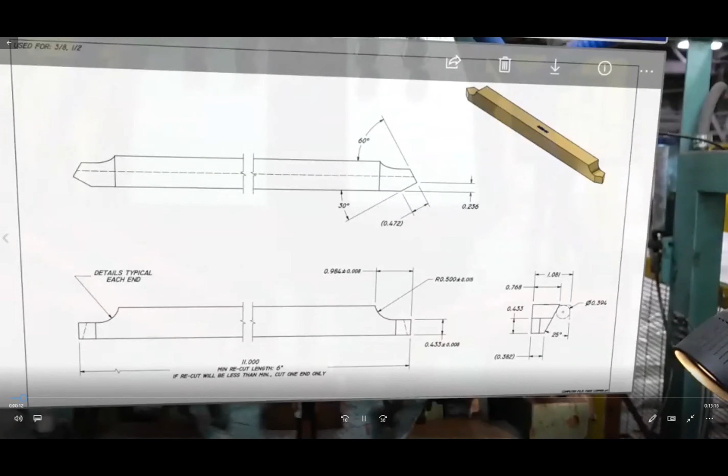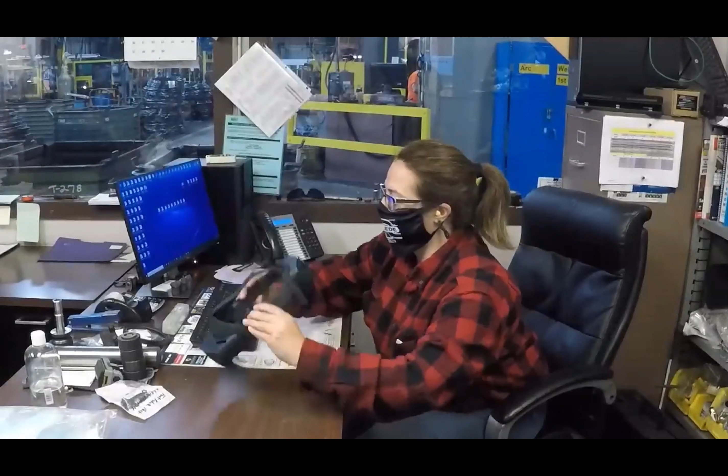So what is the HoloLens? The HoloLens is one way we're working smarter these days at Laclede Chain Manufacturing. This ultimate mixed reality device helps our maintenance department and gives our customers real-time visibility into their quality control process. Today, you'll be experiencing this technology firsthand. We'll be showing you two areas of our quality department: proof testing and pull testing to destruction. The HoloLens is certified protective eyewear made to withstand industrial environments. This augmented reality offers immersive interaction with remote support. Our quality control technician, Jesse, or any Laclede team member using this device, can view documents, prints, and 3D CAD models in real time. Now let's go experience traceability firsthand with our HoloLens.

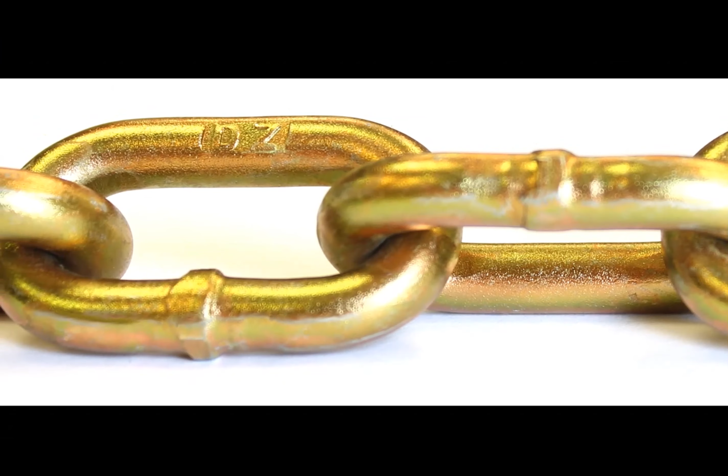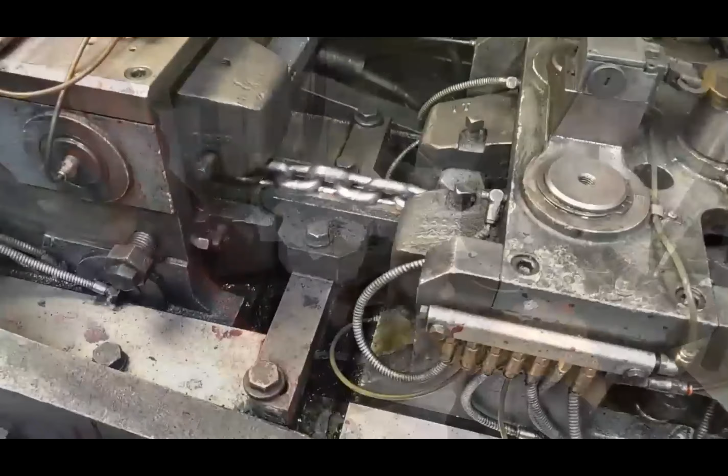At Laclede, every 6th link of chain is stamped with a unique trace code. If you were to have an issue with your chain, the trace code is what you would reference. All of our testing data is tied to that code. We test every link of chain twice, once after welding, then again during proof testing. We store all the critical weld data for each link, as well as the force at the proof tester for every pull of 2 times working load limit. All of this data is saved and archived and can be easily referenced if a customer has an inquiry.

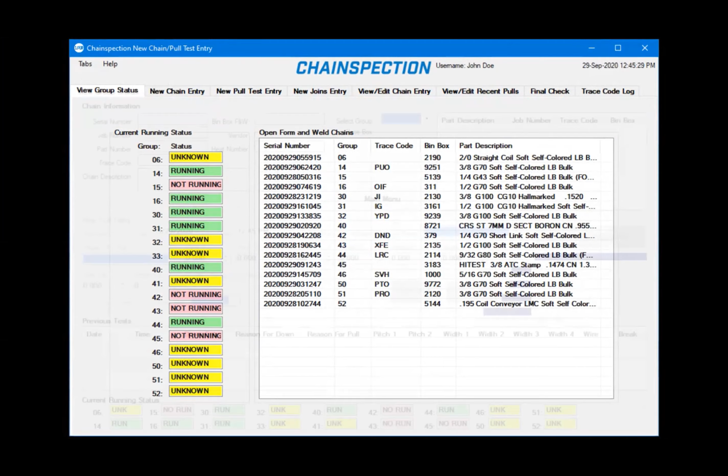Bo, could you please describe the system that we use to archive all of this data? Yes, our proprietary quality system is called ChainSpection. We developed this system in-house specifically to meet the needs of our team, but also our customers. And we're continuously making updates and improvements as the needs evolve.

Thanks, Bo. Now, can we take a look at each step of the chain making process to see how it all comes together? Sure thing, Eric.

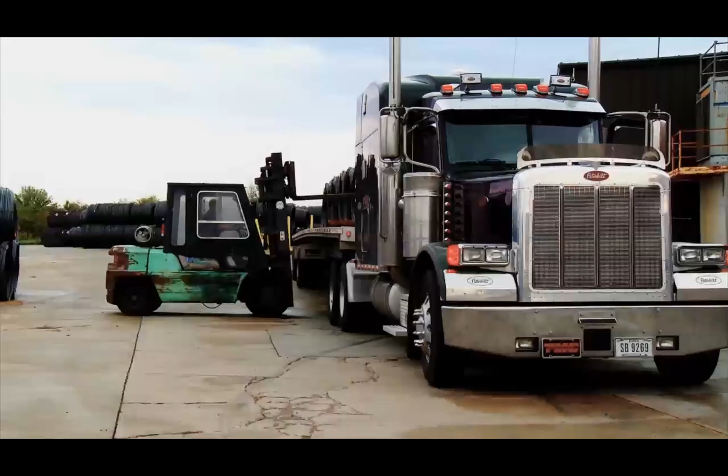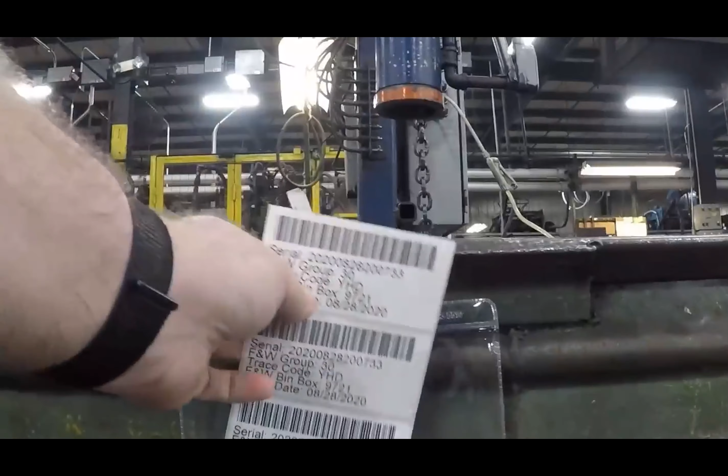So all chain starts out as steel rod. When the rod is loaded on our form and weld group, the job number barcode is scanned, which links it to the trace code as well as the bin box that we're manufacturing. This step links the material supplier, and therefore material composition and properties, to what will eventually become your chain. During the process of forming and welding the rod into chain, critical process data is stored for future access.

Once the box is completed, it's weighed off and tracked to its next destination. Bo, typically the next destination is our heat treater for our through-hardened products like our alloy chain and our transport chain. Could you describe how that works?

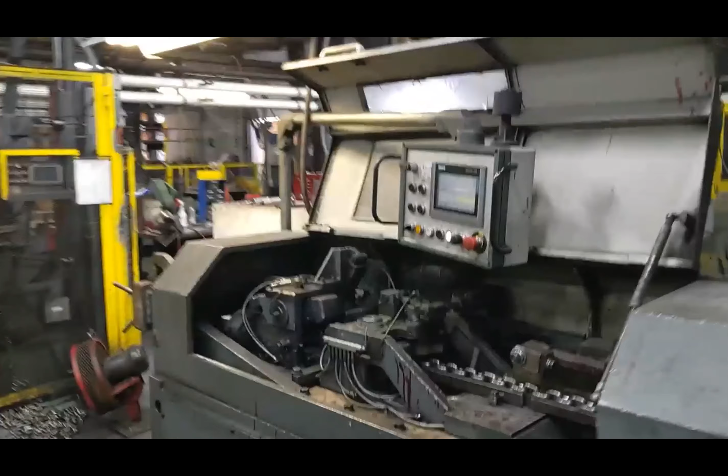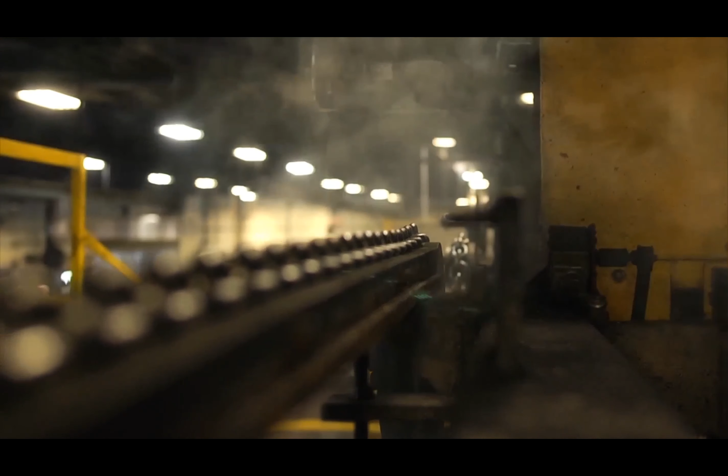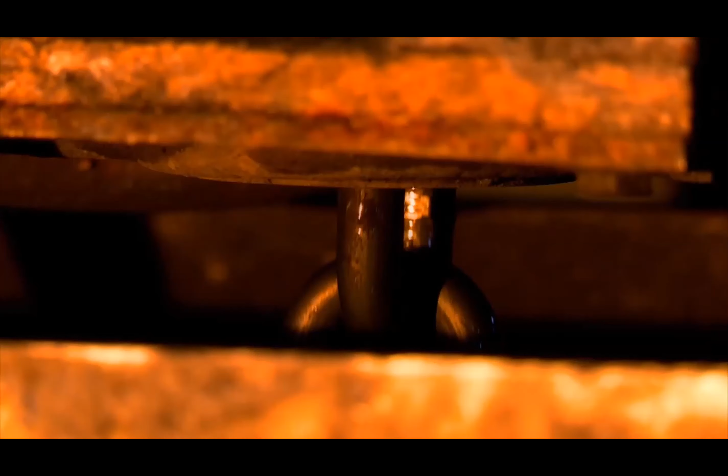Yes, but before we get to heat treat, first we calibrate the chain to make sure that the length, or what we call the pitch of each link, is consistent. Then we go on to heat treating. All transport and alloy chain is sent through our continuous induction heating, quenching, and tempering line. Chain is heated to over 1600 degrees Fahrenheit, water quenched, and then tempered at over 400 degrees Fahrenheit. This all occurs in less than 20 seconds. From here, the chain will then be proof tested using our automated system.

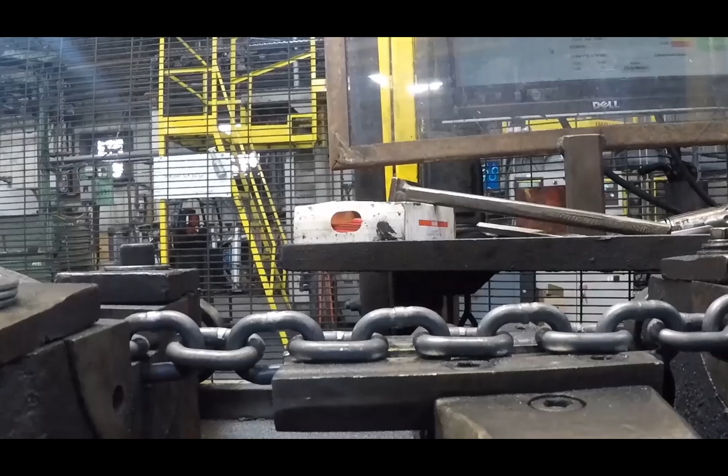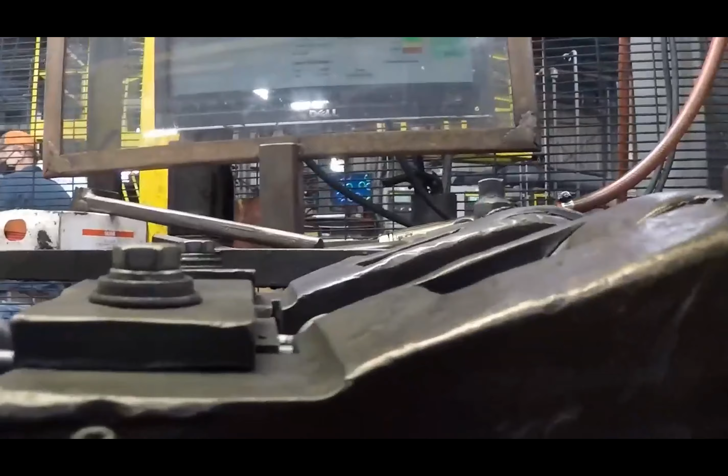Now let's take an in-depth look at one of our proof testers. The proof testing process tests the strength of the chain, specifically concentrating on the welded section. If a proof test fails under the required limit, the process is stopped and more details regarding the break are recorded in the system. At this point, the quality assurance technician will take and destruct test each end of the chain until each side passes two full destruct tests. Once both ends are quality verified, the chain will be manually joined with a quick link, which will then be re-welded at a future stage of the process.

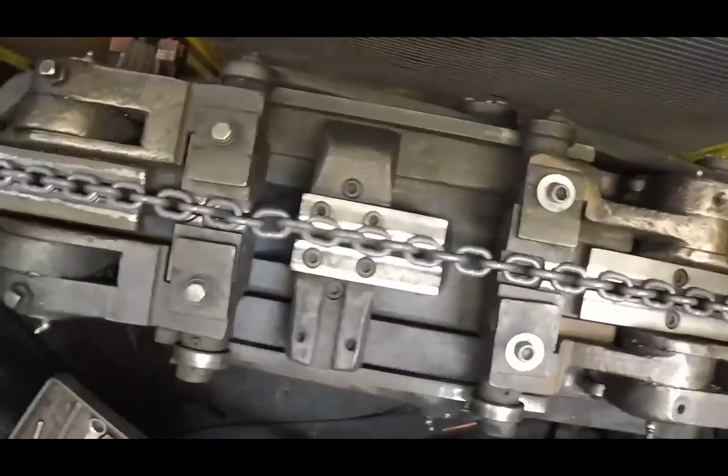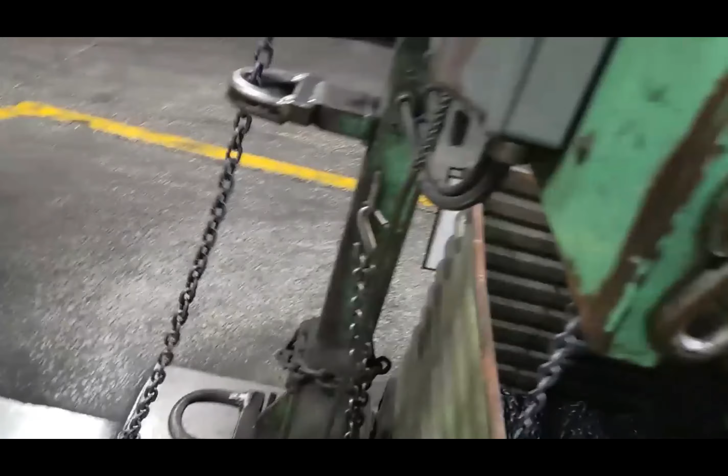But this type of destruct test is not only done when chain doesn't meet proof test value. We also do destructive testing where samples of the welded chain are cut from the production run several times per shift and pulled to destruction to verify the integrity of the weld and other physical properties.

Speaking of destructive testing, let's join our quality inspector at our tensile tester, where they're about to test some chain with one of our customers watching the process.

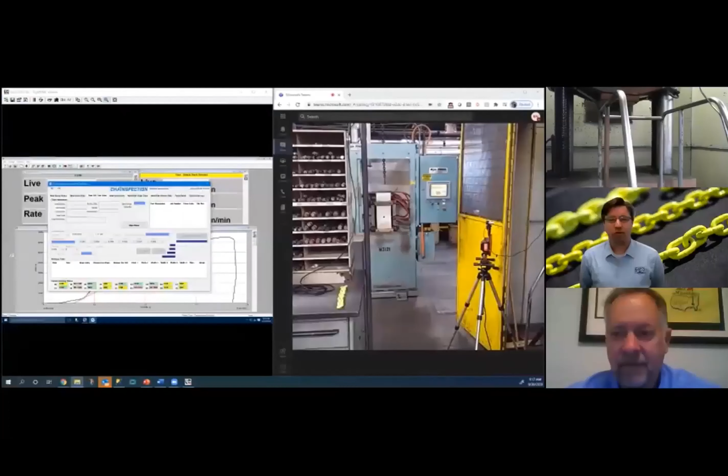Tim, could you please introduce Bob Truitt? Thank you, Eric. Many of you already know the legend himself, Bob Truitt. Bob's father, Harry, is one of the founding members of AWRF, and his family has been an active part of AWRF ever since. Bob's the current Vice President of Western Sling, and we're very excited to have you with us for this virtual destruct test.

Bob, one of our popular products for Western Sling, and for your customers, is our grade 100 Hi-Viz yellow chain. So we're going to pull some Hi-Viz chain to the extremes today. Are you ready to see your chain get destroyed? Yes, sir, Tim, thanks for the opportunity. Yeah, this is going to be a great time today.

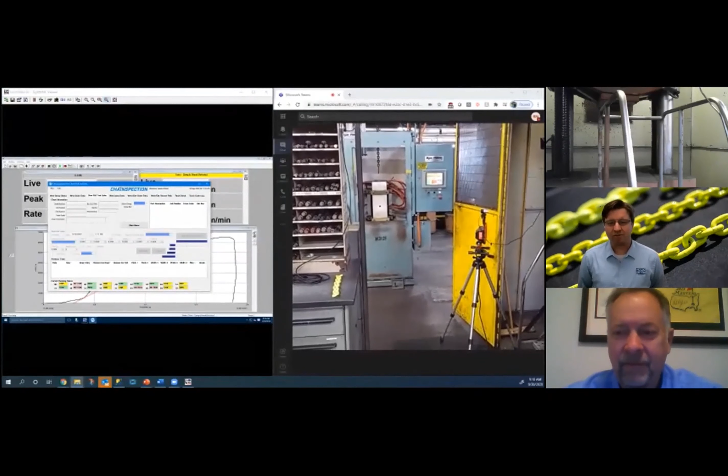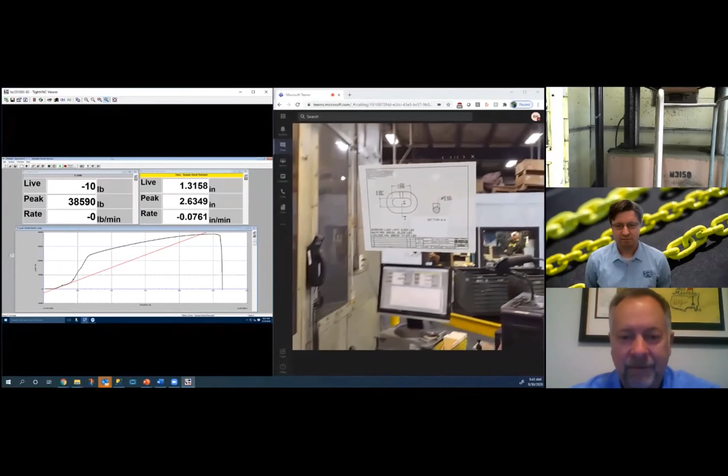Hey, thanks guys. So I'm gonna apologize a little bit—obviously this is a manufacturing floor, so it can be a little noisy. Hopefully you guys can hear me okay. So today we've got some 3/8 grade 100 Hi-Viz yellow.

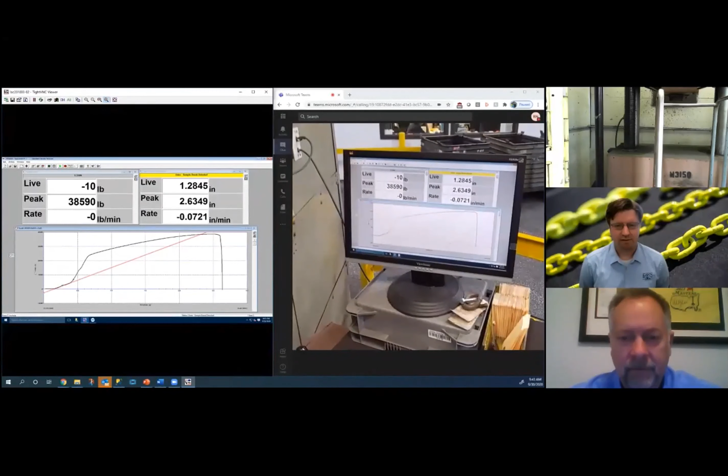So we're gonna do some measurements, show you how our system works, and do a test. So, you know, this is a finished piece of chain, but as it would go through our process beforehand, our quality system maintains and tracks all the dimensions and tests. I've also got a drawing pulled up, and we'll run through the measurements real quick.

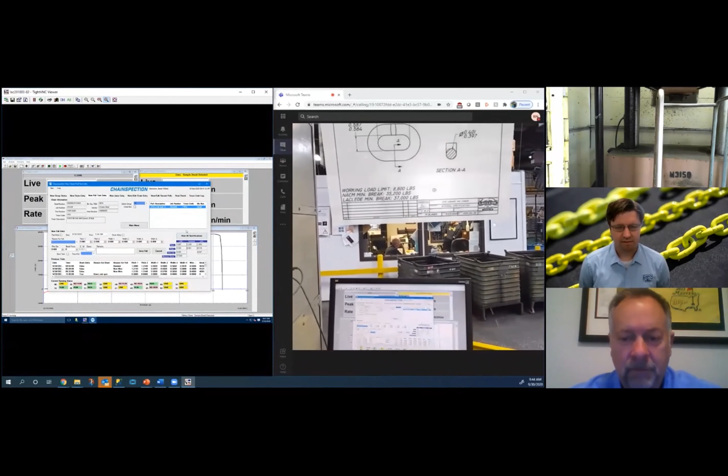So first I'm gonna check the pitch, internal 1.208 to 1.232. 1.225—yep, let go, that looks good. Usually measure two lengths or three. 1.222, 1.223—yeah, about right on nominal.

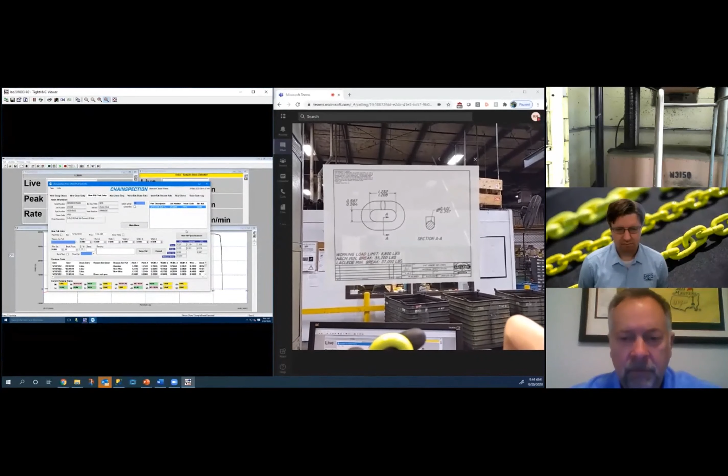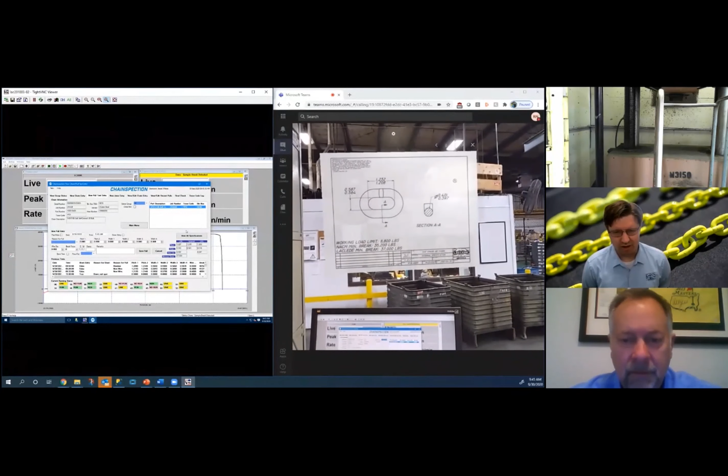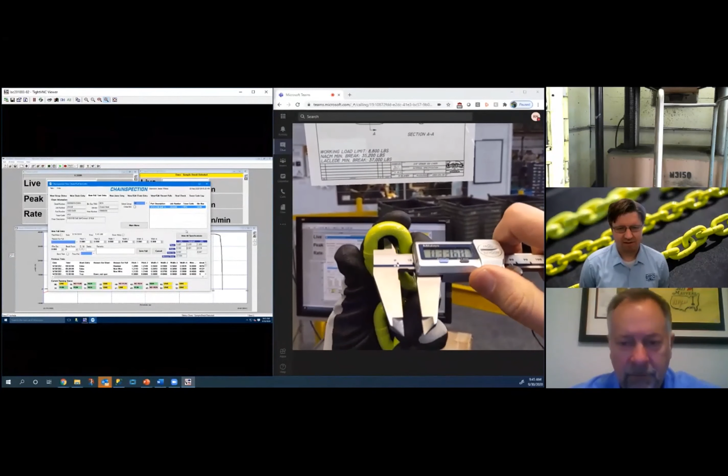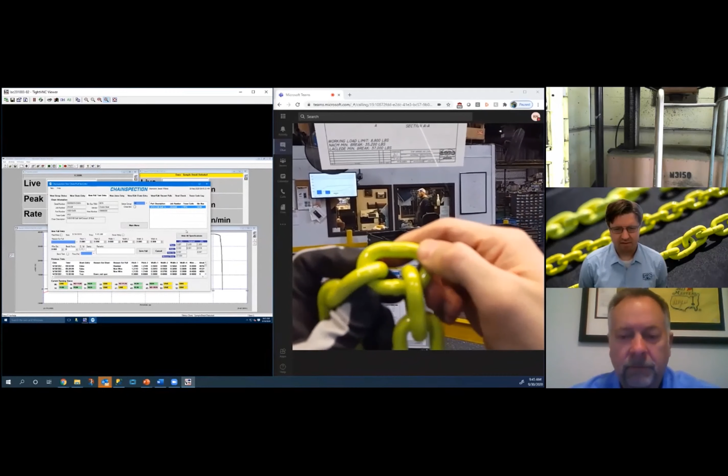We'll check our width. We measure the width by the internal mandrel postmark, touch calipers on one side, come across—and because everybody measures a little bit different, it's not quite an exact science. I'm getting like 584, 585. Hey Phil, can you look down just a little, check another length? A little out of view. Yeah, there you go, perfect. Oh, sorry. Yeah, so that's a 582. So that looks pretty good. You know, the chain itself is pretty straight, not crooked. Obviously the coating looks real good. I'm not sure how well that comes through, but there's the trace code YHC, and obviously there's the L10.

So yeah, let's test this. All right, let's do it.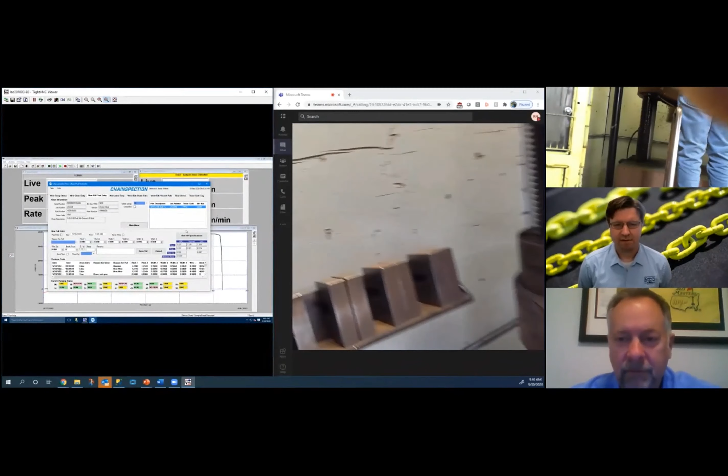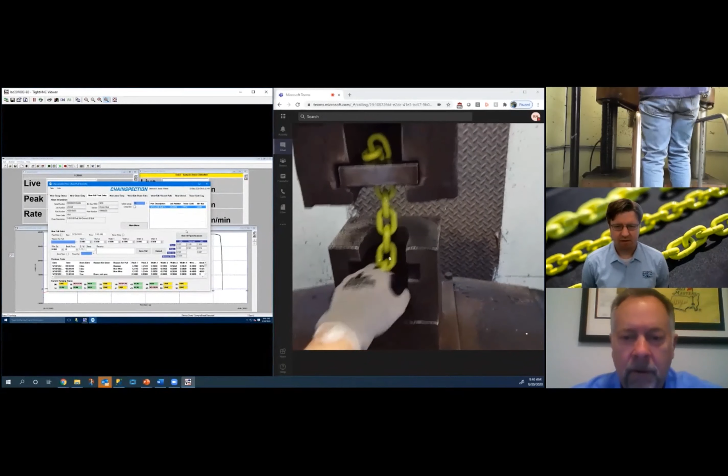So this is our tensile tester, and we've got these test blocks. The NACM spec says we're going to test 7 links. So you have to adjust the crosshead so those 7 links fit in there. You're not going to put any tension into the chain. Try to adjust it just so it's just tight.

And then Jason will get the camera set up here. So, Bill, what would happen if you, as he's setting up the camera, what would happen if it was too tight? What would happen?

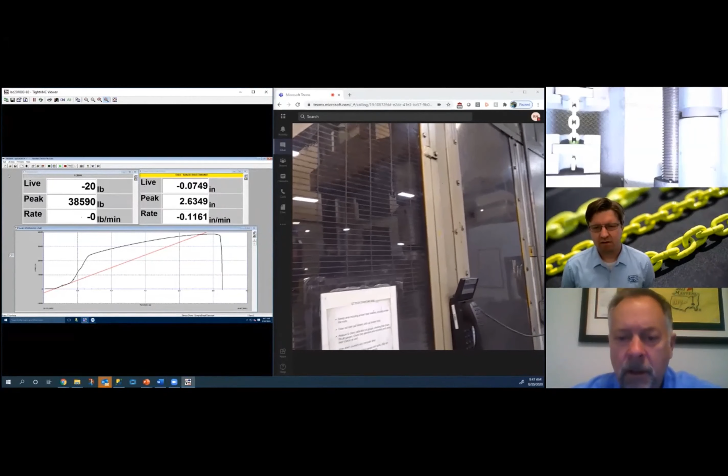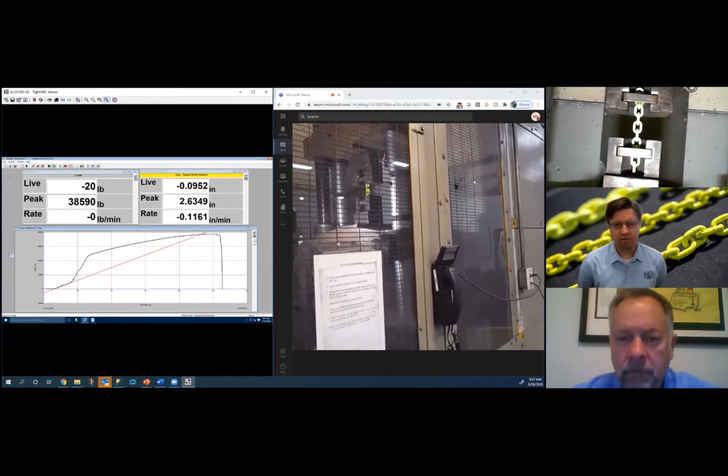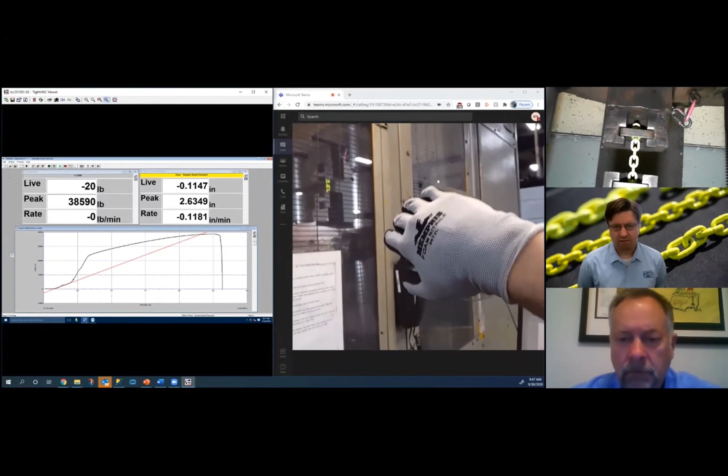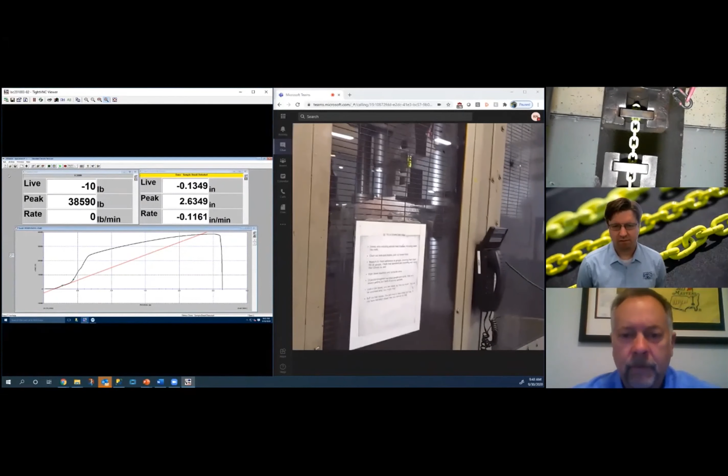Well, if it was too tight beforehand, you're not going to get an accurate number. The other thing, if it wasn't tight enough, or if I didn't wiggle the chain like that, one of the links might sit a little crooked, and then lots of times you'll see in a test where it'll come up, and then that chain link, when you put tension on it, is crooked. It kind of pops around and it drops, so that's just getting everything seated and ready for the test. To me, it gives a more consistent and accurate test.

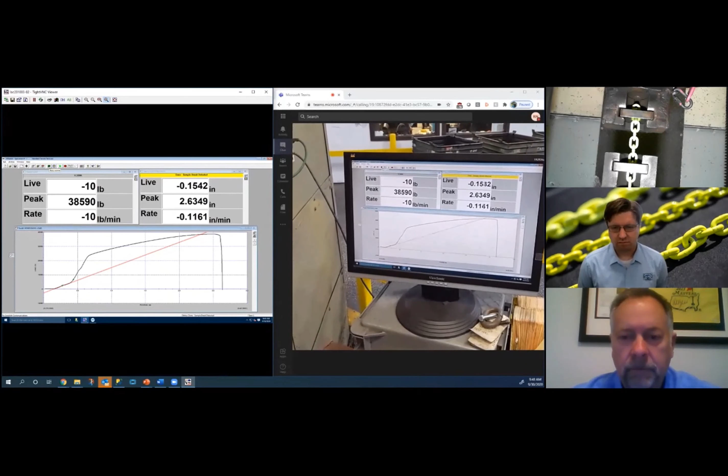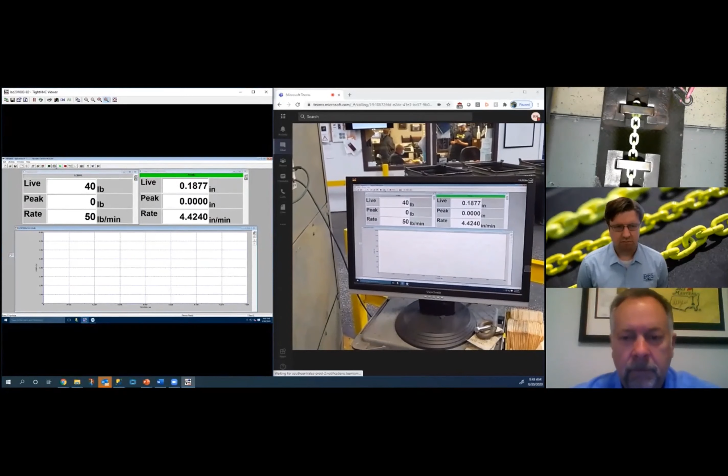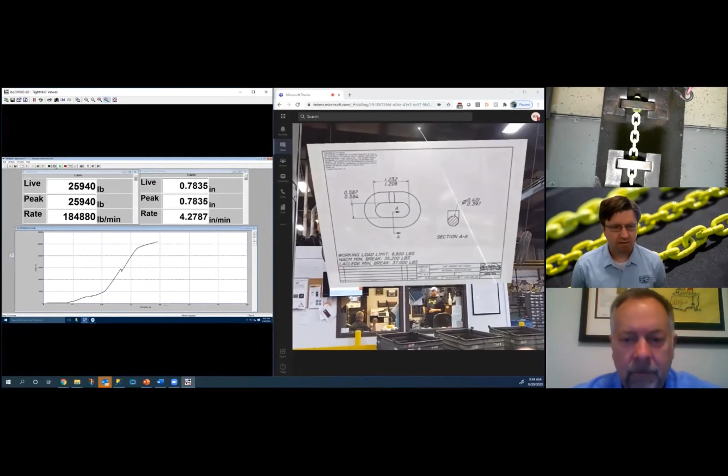Nice. All right, so first we'll zero out the load. Start the pump, close the valve. Here we go. And there our test begins. The minimum break on this is 35,200 according to the NACM.

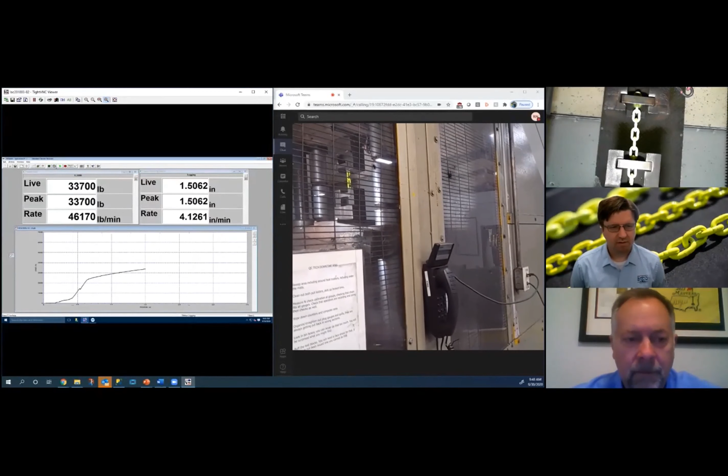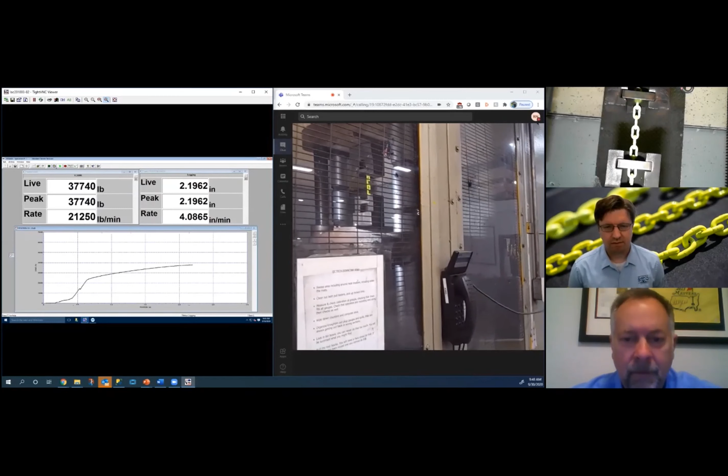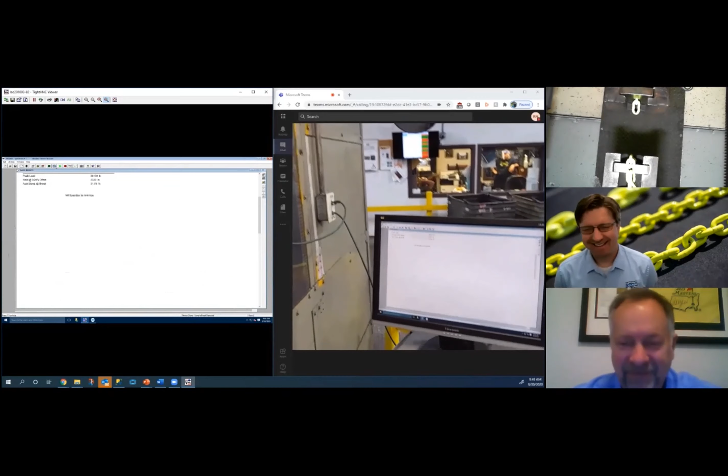All right, we just passed the NACM minimum break. You can see the chain's elongating nicely. There we go. There we go. Nice yield. Elongation was 31.8%, 31.79.

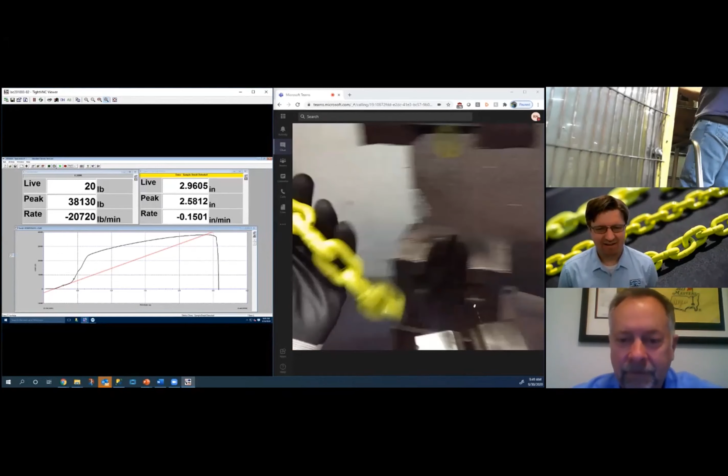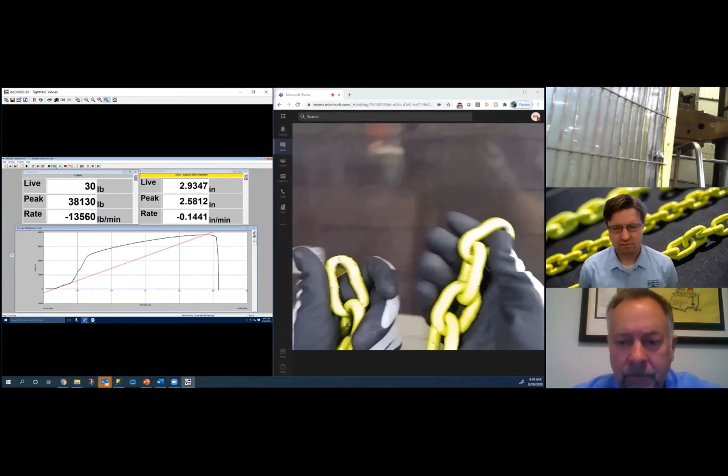So that was real good. Yeah, that was nice in shear, good elongation. Yeah, that was a good break.

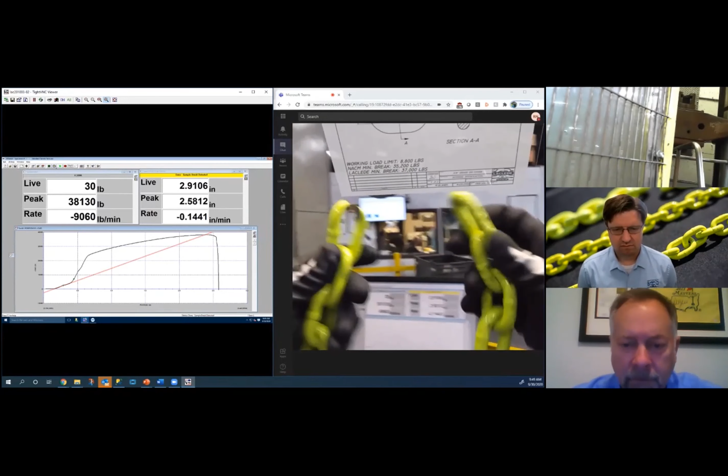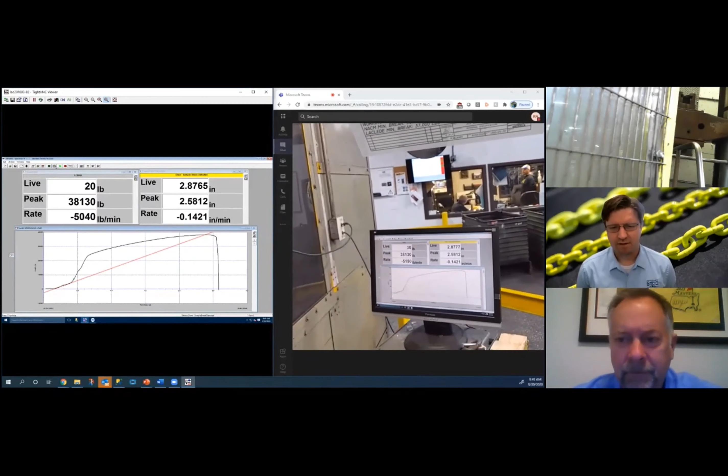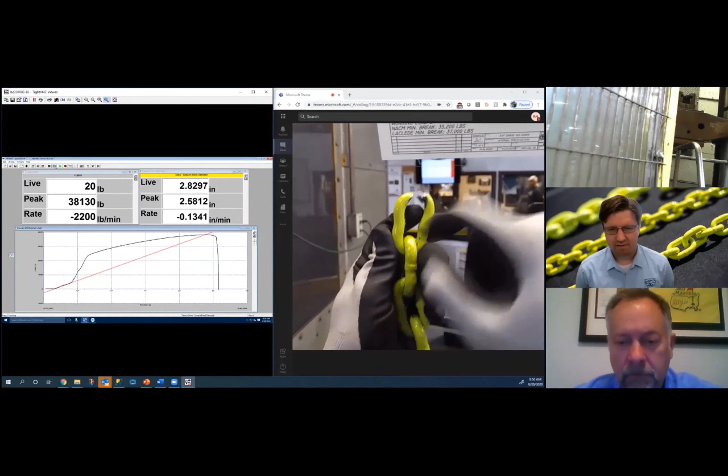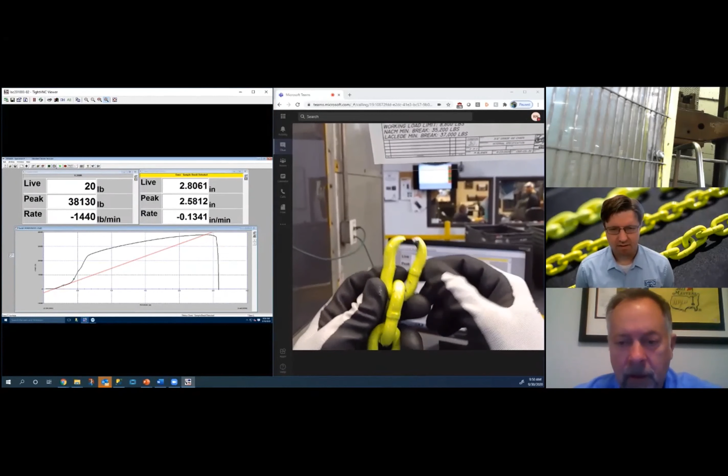Hey Phil, why do we want the end to break? Why wouldn't it break somewhere else? That's a good one. So the end of the link, because of the design of chain itself, we're going to call it a shear failure instead of a tensile failure. Obviously, a weld break is not desirable, but even sometimes if there is another stress riser or mark on the chain, it might stretch down and break on the back side. But this is the ideal failure that says, hey, the geometry's good, there's no marks, weld was good.

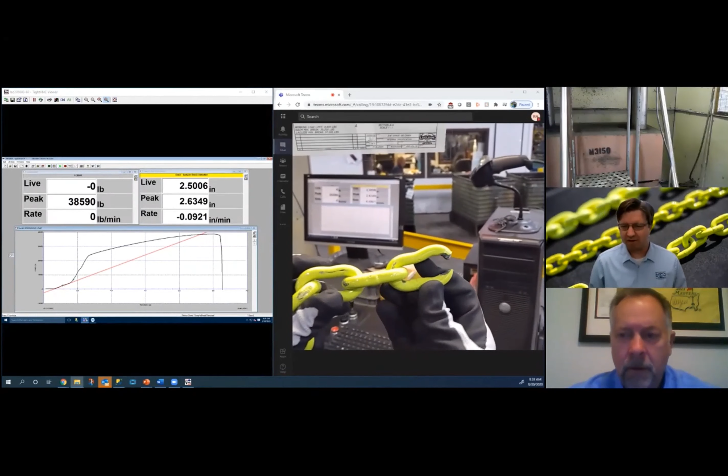Again, good elongation. How was that? Did you enjoy that? Yes. Always like to see things break somewhere else, not in the field.

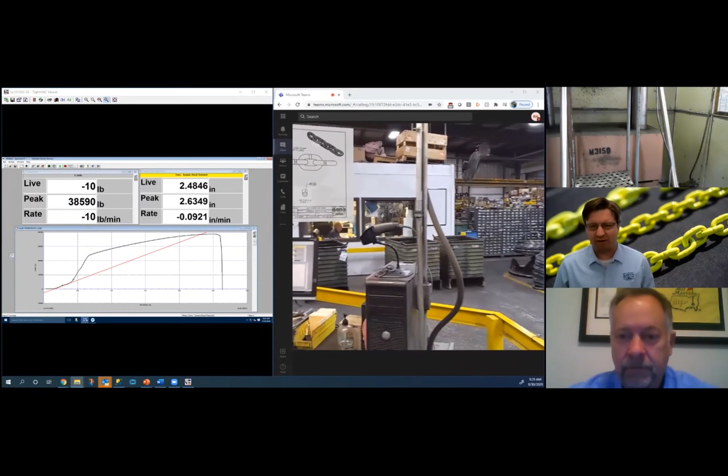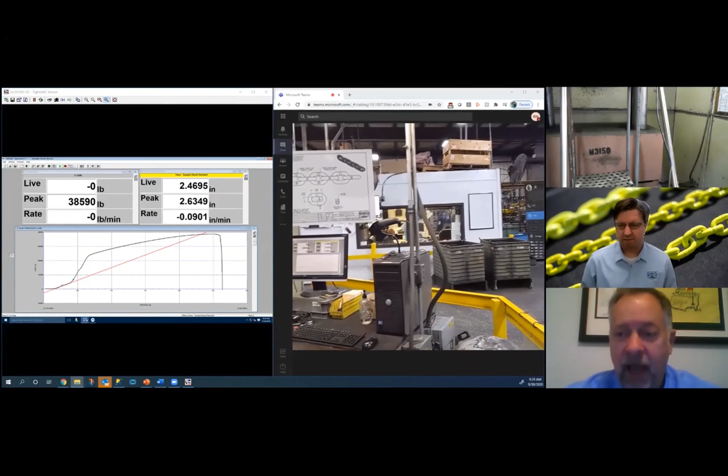Do you think some of your customers might enjoy seeing a presentation like this? Yes, because I think there's a lack of knowledge in the industry about how chain is made and what the process is. People don't get the opportunity, of course, to just go visit your plant. I think this would be a great way to do it.

It feels a little more personal than a video, than doing a YouTube video that may be overproduced. But I think people like to see and know and understand that chain is tested, and why chain is tested.

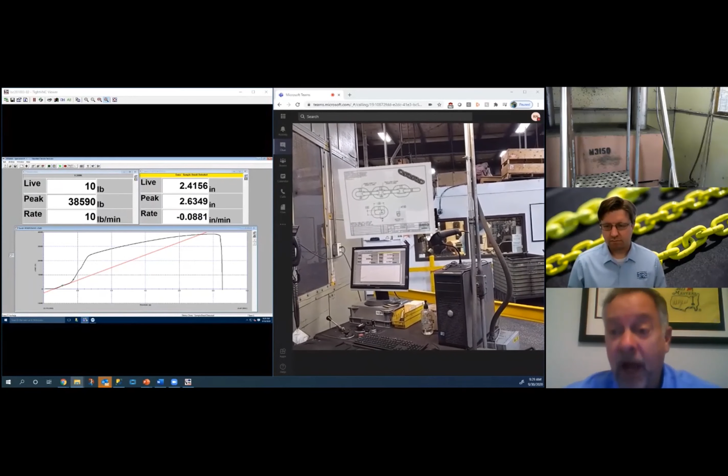Well, I think it's way cool that an old company making an old product is using 21st century technology. Technology for technology's sake is fun, but we're trying to do something that is meaningful for our customers.

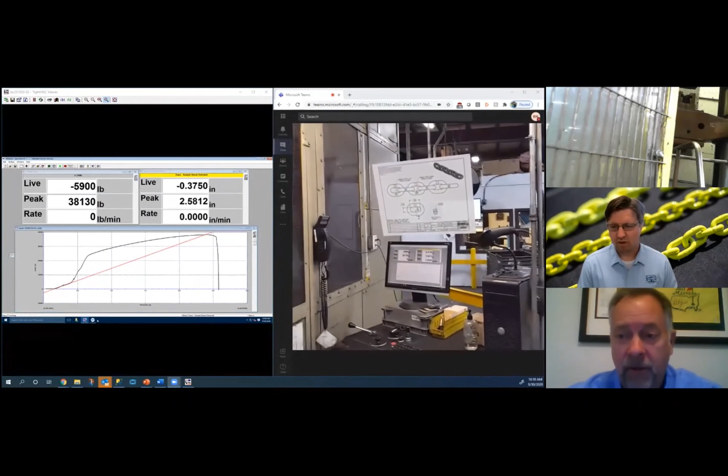I want to say thank you to the Maryville team and just say we destroy our chain in our house so it doesn't destroy your reputation. We all know chain is used in critical applications such as overhead lifting. Accountability and quality are two key ingredients to consider when picking a chain source.

As you just witnessed, we exceed chain manufacturing standards, so you have a trusted source. Now, with the HoloLens, you and your customers can witness a live pull test of your chain and actually see through the eyes of our inspectors at Laclede. It's really the next best thing to being in our facility in person, which today is more complicated than ever. Our team can also recall all data that pertains to your chain in a few clicks, thanks to our chain inspection system.